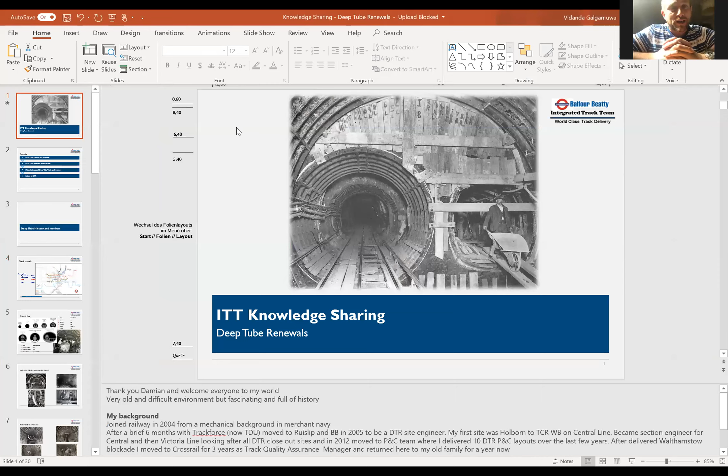So now for the main event, ladies and gentlemen. We're looking forward to Dan Onose doing his DTR delivery presentation. Dan's going to be touching on the unique challenges and absolute expertise that is absolutely unique to ITT working in the tube. Dan has 16 years experience, predominantly in concrete at track. As a site engineer on Track Alliance, we delivered DTR projects across the Central and Victoria line. We sort of landed around the same time.

When we arrived, we were delivering 1 or 2 sleepers a night. We were integral to increasing the output, and the best shift we ever did was at Mile End one night - we put 14 sleepers in one night. Now that's only 7 meters, because the sleepers back then had to fit into the tunnel rings, and they were put in at 503 millimeter centers.

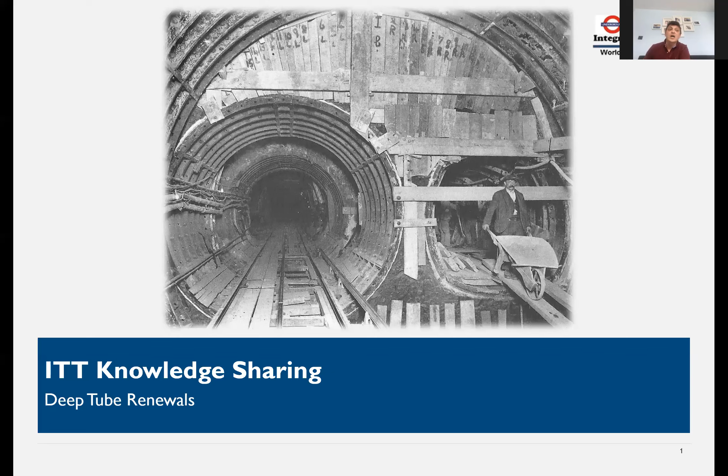So we're going to start with a history lesson and a few interesting numbers. I'll then briefly explain deep tube renewals methodology for those not familiar, chat to you about main challenges in the tunnels, and finish off with a quick look at what we're working on to improve delivery.

Deep tube history and numbers. London Underground's 11 lines total 408 kilometers in length. 45% of the network is in tunnels, of which there are 32 kilometers in subsurface and 149 kilometers in deep level tube.

A few numbers to note: the deepest station below street level is Hampstead at 58.5 meters. The longest section of tunnel is East Finchley to Morden via Bank branch on the Northern Line, that's 27.8 kilometers. And the maximum depth below ground level, again on the Northern Line around Hollybush Hill near Hampstead, is 67.4 meters below ground.

In terms of turnouts or P&C numbers, we've got around 850 on running lines, about 1,100 in depot and sidings, but we have just over 200 P&C units in deep tube concrete on our network.

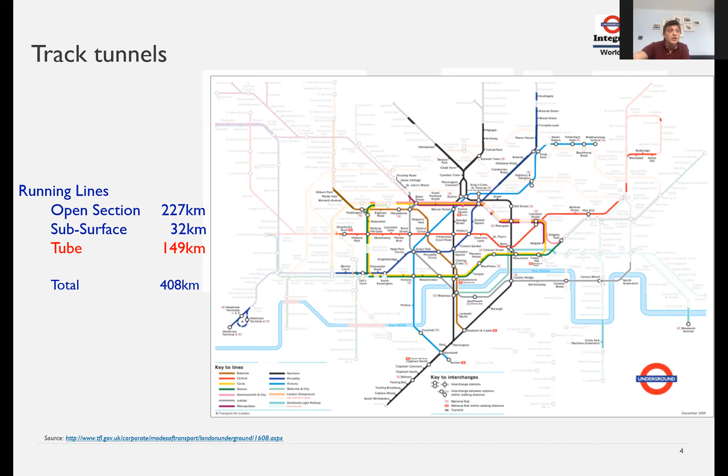Right, the tunnels. These are just cross sections showing the internal diameter of existing tunnels in London. Most deep tube tunnels have the same principle: 6 segments and 1 keystone. The keystone is used to lock the segments in place, and its location moves depending on the orientation of the tunnel. Most tunnel rings are grey cast iron, apart from the Victoria Line, which has concrete rings.

Brief history of deep tube tunnels. The Tower Subway is the first deep tube cast iron tunnel beneath the River Thames in central London. In 1869, a 410-meter circular tunnel with 2.1 meter diameter was dug through the London clay using a cast iron shield. Today, the tunnel is used for water mains.

Opened in 1890, City and South London Railway was the first deep level underground tube railway in the world and the first major railway to use electric traction. Today, its tunnels and stations form the Bank branch of the Northern Line from Camden Town to Kennington, and the southern leg of the line from Kennington to Morden.

Central Line opened in 1900, and its trains run in 2 circular tunnels having diameters between 3.5 meters, that's the White City to Liverpool Street section, and 3.7 meters for the remaining deep tube section. Victoria Line was constructed in the 1960s and was the first entirely new underground line in London for 50 years, with diameter increased to 3.8 meters. As a comparison, the Northern Line extension, due to open hopefully next year or 2022, has an internal diameter for running tunnels of 5.2 meters. Crossrail, although late, will be a fantastic new line with 6.2 meter diameter tunnels. Just to give you an idea, I could fit a Class 66 loco comfortably.

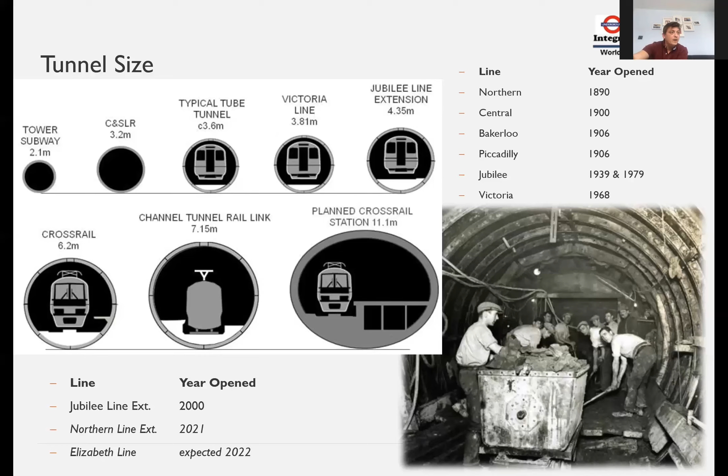Right, who built the tube? A particular band of hard-working men known collectively as navvies, the vast majority being former tin miners from Cornwall or farmers from Scotland and Ireland who had come from building the canals.

Construction methods used across London's growing underground railway improved since the opening of the first line in 1863. Tunnelling shields, based on the same principle as the pioneering device designed by Marc Brunel for his famous Thames Tunnel, were used to build the tunnels of what today are the Northern, Waterloo and City, Central, Bakerloo and Piccadilly lines. It was still a back-breaking job for the men working at the face of a tunnel shield.

The vast majority of construction work was still being done by hand. Unlike the cut and cover method, which only required shallow trenches, the deep level lines were built far below ground with actual tunnels being built.

Conditions were cramped, dark, cold and wet. They were working for a rate of pay that, although cheap to the company, was actually generous in comparison to other jobs. By standards of the time, navvies were well paid. They could earn 25 pence a day, that's £30 in today's money, which was almost double to those who worked in factories.

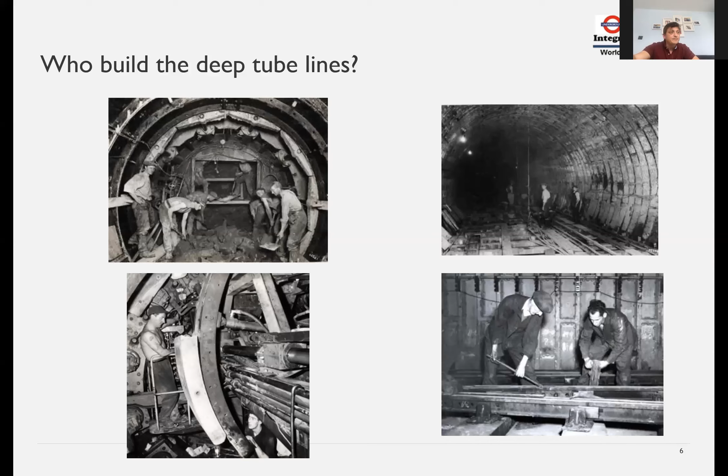How did they do it? How did they build these deep tube tunnels? After they dug the tunnels, most track laying activities were done by hand, as shown in these photos.

As you can see, everything was done by hand, swinging hammers and knocking the track into position.

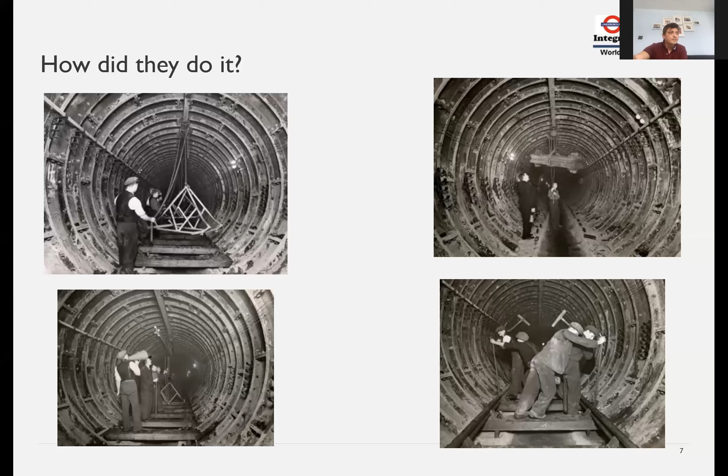Existing track form. So interesting fact, Central Line has the smallest radius on the entire London Underground. We have Caxton Curve with a 62-meter radius. Piccadilly eastbound at South Kensington has 89 meters. Bakerloo line southbound at Paddington has a 90-meter radius. So we're talking about very tight radius in the tube.

The original track consists of timber sleepers and bullhead rail with shingle filled channel. In platforms, there are concrete pits with timber pit blocks. Because of the age, this track is obviously life expired. Various attempts had been made in the past to introduce improved track forms. This included trying concrete sleepers using NTF415, so-called hedgehog concrete sleepers. In the platform areas, we had trapezoidal pit blocks, rubber booted pit blocks was also tried. Finally, direct fastening into concrete using Hilti anchors was tried as well.

In early 2014, Deep Tube began using Delkor direct fastening resilient baseplates. Several Delkor types have been tried, but now the 195 model is the normal choice.

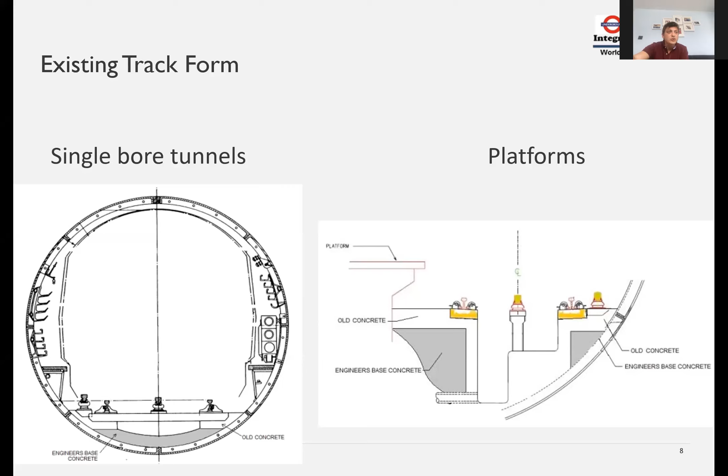Some fun facts about Deep Tube. Top right is the dead-ended tunnel. At Elephant and Castle Tube Station, there's a false brick wall, and the tunnel actually continues for a few miles to Camberwell Station. Engineering works begun and then abandoned in the early 1900s, and the tunnel is now sealed. A recently announced extension of the Bakerloo line to Lewisham via Old Kent Road and New Cross Gate has been chosen as the best route. Works are planned to start there in 2023. Depending on the final plans for the junction point, that could see the disused tunnel repurposed as additional storage for trains.

In the middle, it's cooler below poster - so I always said that to my DTR colleagues, and I was not referring to temperature. When the early tube tunnels were dug, it was so cool down there, 14 to 16 degrees Celsius, that the cool tube was seen as a break from the summer heat on the surface. Why suffer on a bus in the heat when there's a cool tube to take instead, said the marketing man. A few more details about this later on when we cover the heat and ventilation.

Bottom left, with a vertical rise of 27 meters and length of 61 meters, the escalators at Angel Station are the longest on the London Underground and the second longest in the UK. There's actually a longer one at Heathrow Terminal 5.

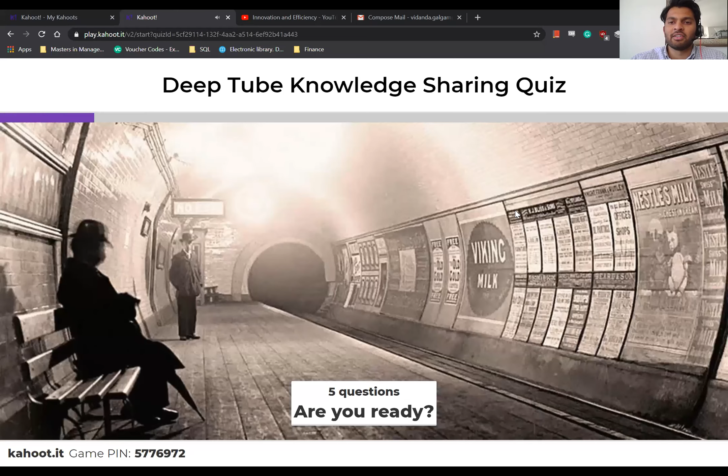Let's start, so this is the Deep Tube knowledge sharing quiz. The first question is, how many passenger journeys does the tube handle in one day? Is it 2 million, 8 million, 5 million, or 0.5 million? Remember, the quicker you answer, the more points you get. Three seconds left.

Okay, 11 people got it right, very very nicely done. Churchy is on top, nice one Churchy.

Second question is, which is the deepest LU station? Is it Covent Garden, Hampstead, Victoria, or Waterloo? 10 seconds left. There you go, 25 — so everyone was listening to you, Dan.

You'll be happy to know. Who's in the lead now? LW's taken the lead. The third question, which station has the longest escalator? Oh, that's an easy one. Hampstead, Westminster, Angel, or Clapham Common? Again, everyone's very quick in answering. Three seconds. 24, yes, very good listeners. This is too easy, LW still in the lead.

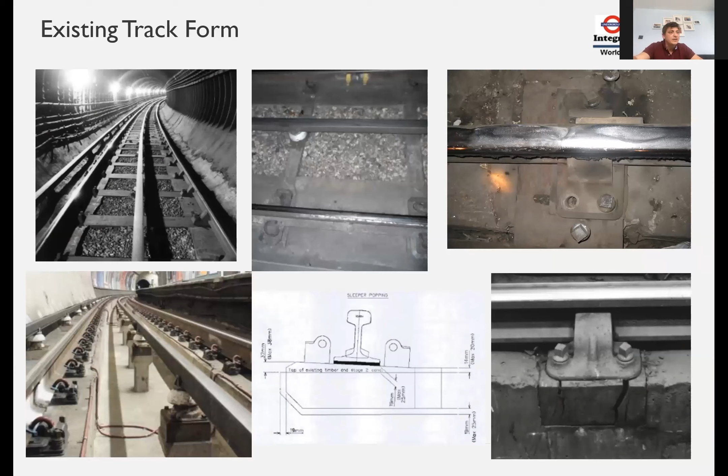Right, prep works in the deep tube. I'm only going to go through some of the prep activities we don't see on a BTR site. So shingle removal throughout the installation section. Then once you've done that, temporary walkboards placed throughout to have a sound emergency evacuation walkway and a safe walking route.

Asbestos removal, I'm going to touch base on that in a minute. Temporary sleepers installed to hold track alignment during platform recon jobs. Then you've got the site mobilization, because a majority of track recon materials have to be delivered to site prior to commencing the recon activities.

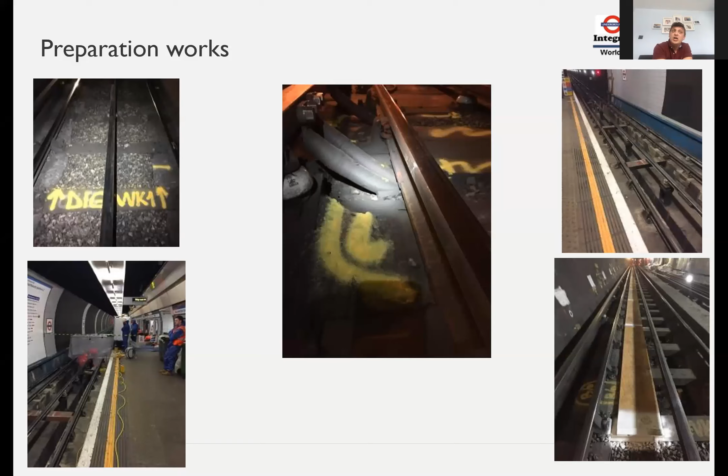Site prep drilling for bursting or breaking out where needed. And I'd like to spend a bit of time on posi conrail plinths or power cables. If you look at that photograph in the middle, obviously when you convert the bullhead to a flat bottom, that will clash. So there's a lot of prep works involved.

So first part of a recon shift is the removal of old sleepers and concrete. One thing to note here, the new rail, once installed, will always be realigned to new design prior to reconditioning. Where possible, design levels will also be implemented, although typically a certain amount of this is undertaken during the actual reconning stage. So once the area has been identified, any design alignment adjustments are marked up by the engineer.

Sleepers cut or popped out of their pocket. Concrete bursting carried out, concrete separates from the engineering base. Manual breakers are used to reduce large sections of concrete that are too large to manhandle. Spoil created, packed, and swept.

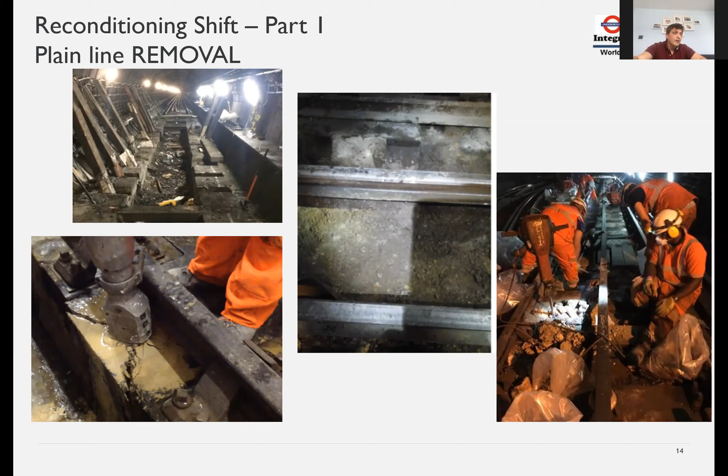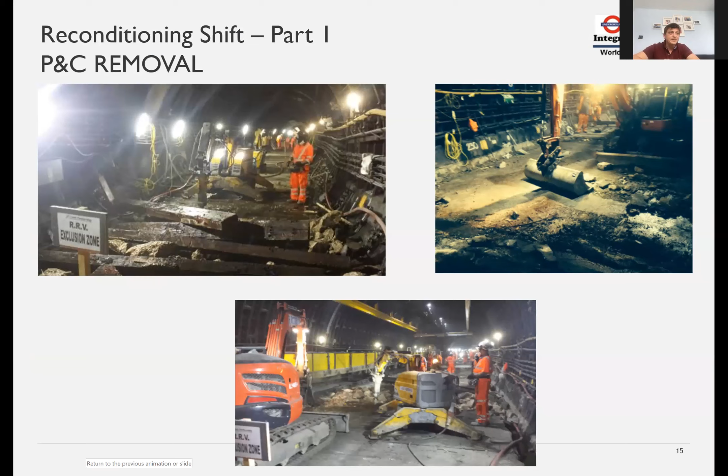Right, second part, the installation of new base plates and concrete using top-down methods. So same as most of the slab tracks methodologies, we're using top-down method. Pre-assembled Delkor base plates are hung onto the rail.

Shuttering installed using spacers to enable later on to install the GRP walkway, that's glass reinforced plastic. Track alignment checked against design. So for the engineering hour works, no jig supports are needed, the sections of track are too short to allow any movement.

Clay applied around base and sides for preventing concrete running out. Track components protected from concrete splatter. Rapid hardening concrete mixed and poured. We use various types of concrete, but Techrock and Instarmac are widely the most frequent, both with 10-15 minutes workability and 1 hour for 15 Newton strength, which is enough for passenger trains to run.

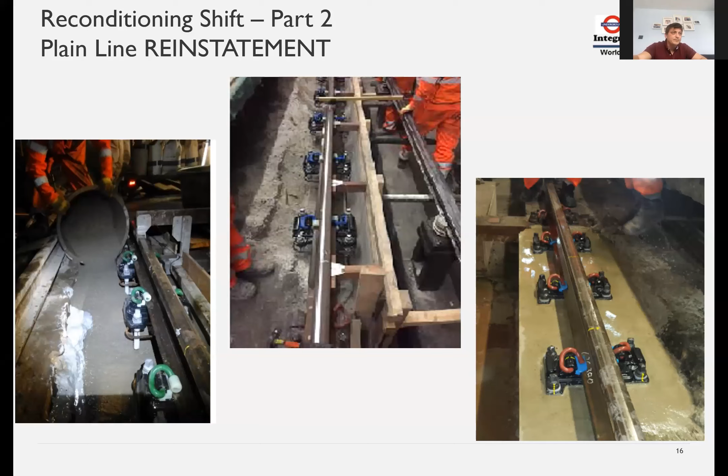P&C recon, like I said, breaking out the engineering base on P&C sites is very challenging because of the size and depth required, and the uneven surfaces can create cracks in second stage concrete once poured. So I've got 2 photographs here.

How much we've changed from when we started in 2011, when we used manual rollers, and now we're using 6-ton gantry cranes. This is Liverpool Street versus Paddington.

So the renewal of points and crossings on London Underground is a complex logistical challenge. In the tube sections, the existing turnouts are cast into the tunnel timber concrete. At the same time, there's a general policy for all renewals to replace bullhead rail with modern, heavier flat bottom rail.

This in turn requires the air-operated points to be replaced by more powerful electric drives, and Sherlock is a good example. In tube sections, the renewal constraints are even greater. So the work on a crossover is often split into two 52-hour weekend possessions, with an inevitable impact on the timetable and inconvenience for passengers.

The temporary sequencing of the works is critical and can often require plain lining of the main route, whilst the other sections of the turnout are broken out and replaced. The new design alignment is also often a constraint, as the new points and crossings have to be fitted within the existing tunnel space. Furthermore, there is an increased risk of engineering overruns because of the complexity of the work and the limited time and access available.

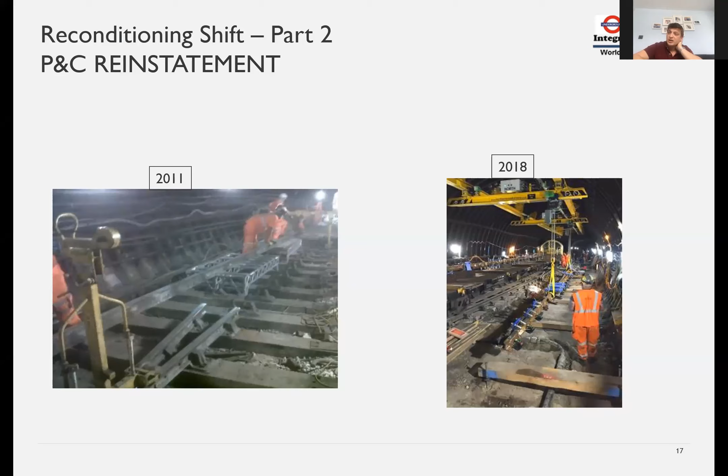So all the gantry cranes we've installed have been passed on to the maintainer. And after a period of a year or two of us maintaining it, everything goes onto the maintenance department, and they find them very beneficial, as they admit it. They get used quite often for deliveries and unloading heavier loads. So there was talks a while back for us dismantling some, but at no point did we do that with any of the permanent gantries that we put in.

Okay, right, deep tube drainage. So last week's drainage session spoke about drainage in more detail, and John O'Sullivan's presentation was quite informative. There's no standard construction across all tube tunnels. They all, however, utilize a combination of common components: small half-round channels running longitudinally at the edge of the track, concrete channels within the 4-foot, usually shingle filled, small diameter 75-100 mil perforated pipes within the channels, and then access chambers, bailing pits, sumps, pumps, associated control equipment.

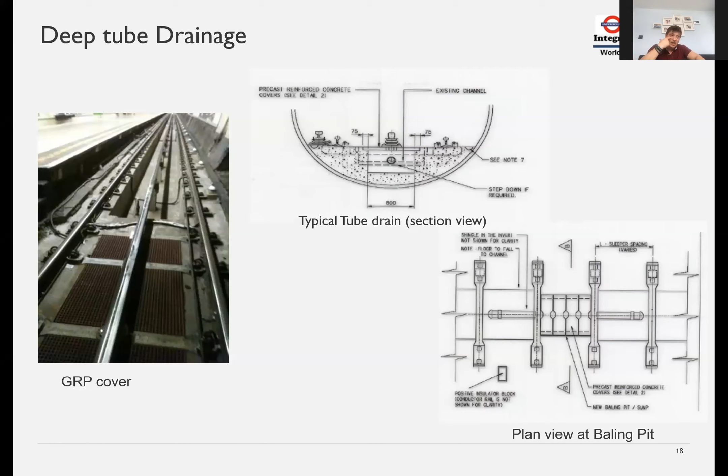That's the usual equipment. We are installing a permanent channel with a continuous GRP cover that also provides a very good walkway. I've mentioned earlier the GRP, glass reinforced plastic, and there's a photo there on the left-hand side.

Right, moving on to main challenges of the deep tube track environment. So the first challenge, probably the most obvious one, is location and space. We have no room for mechanized vehicles to aid with manual labor activities. Although we're mitigating that, and we introduced, like I said, gantry cranes for big P&C jobs. We've got LG1 route approvals for TB250 RRVs and 3-ton mini diggers.

A very big challenge is the age of the tunnels. At Holborn in 2016 in the museum sidings, we removed an 1886 base plate still in service — you can see a photograph top right. Even though it was on the siding road, we're talking about a base plate over 100 years old. Obviously, tunnels are not well understood and catalogued until recently. There's a big safety risk if we lose a tunnel, and a very big reputational risk if we do lose it. There's always progressive degradation — you've got tunnel seepage and corrosion affecting the rail, concrete surface or drainage, and obviously that will slow down the handback to the client.

Tolerances — you've got plus or minus 3 mil. That does require more attention to detail. Why? On my first site, Holborn to Tottenham Court Road on the Central Line, there were train shoe marks on the tunnel render showing just how critical clearances are.

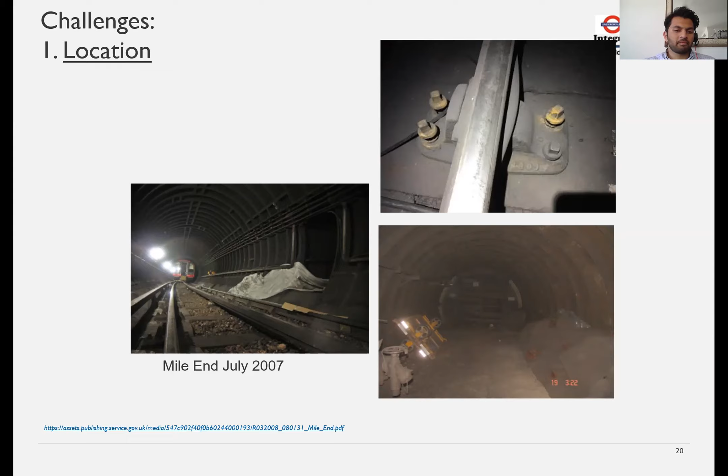Right, moving on to asbestos. As a not-so-fun fact, Steve McQueen did die from an asbestos-related disease. It was thought this was due to asbestos used in movie sound insulation and protective clothing and helmets he wore when racing cars. However, Steve removed asbestos lagging from ships while he was in the Marines.

When planning a job or working in the area, remember the east end of the Central Line, north part of the Jubilee, and most of the Northern Line are known areas to have asbestos, as shown on the map in the middle of the slide. When I started in 2005, most of the Bakerloo Line had the noise reduction shelf that has now been removed.

Central Line sites, I reckon all platform jobs, or at least all the ones I've been on, had asbestos-contaminated pit blocks that had to safely be removed by a specialist contractor. However, that takes a lot of time, and it's something that you need to plan for when you look at similar jobs.

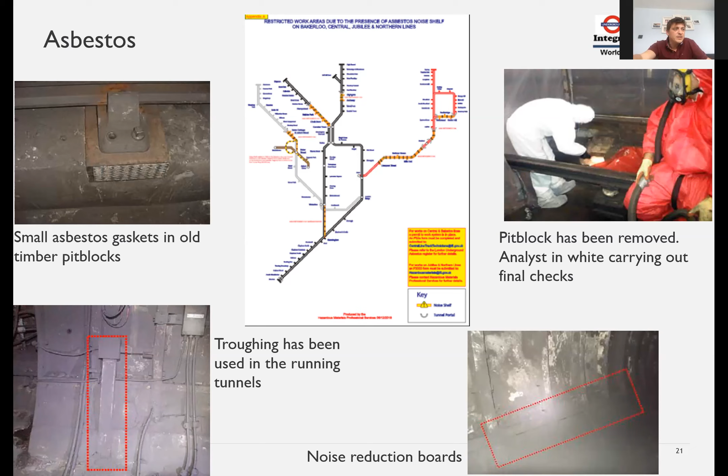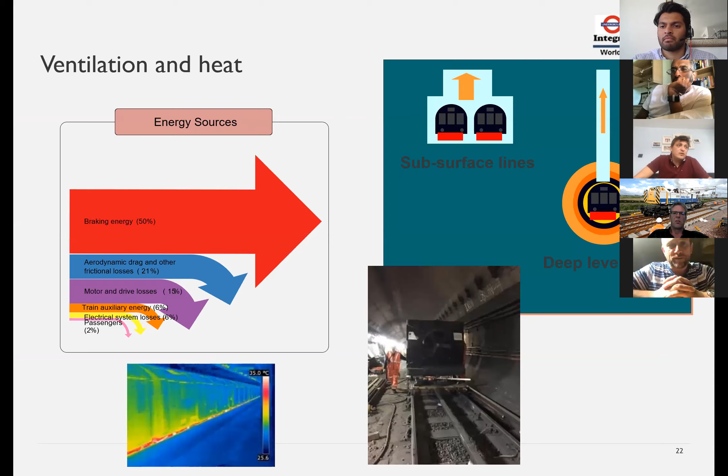Right, moving on to ventilation and heat. About 21% of the heat in the tunnels comes from the movement of the trains themselves, from aerodynamic drag and other frictional losses. The motor engine accounts for about 15%. The electrical and auxiliary systems are the remaining 12%. But about half of the heat in the tunnels comes from just one source - trains slowing down, conversion of movement into heat by applying the brakes.

London's deep tube lines do not have enough air passage to the surface to let the warm air escape, just like the subsurface ones have. We had up to 40 degrees Celsius on sites during weekend summer closures, so you can tell how warm those tunnels can get compared to subsurface.

Where does the heat go? Heat transfer into tunnel walls accounts for about 80% of that. Initial tunnels, like I mentioned, were built and operated at 16 Celsius. Mechanical ventilation, the big ventilation shafts, only remove about 10% of the heat. While that heavy, thick clay is lovely to tunnel through, it's also a very good heat insulator.

Over the years, the heat from the trains soaked into the clay to the point where it can no longer absorb any more heat. So tunnels that were a mere 16 degrees in the 1900s can now have air temperatures as high as 30 degrees Celsius on parts of the tube network.

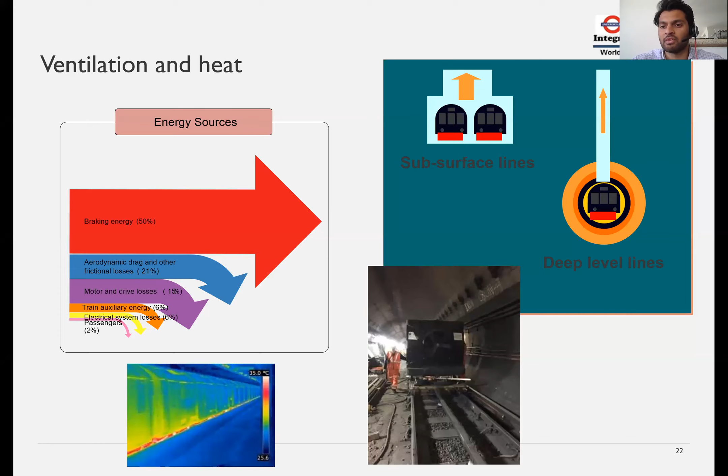Before we move on, I think it's quite a good statement made by Henry Fenn. He's saying there's a hazmat team at LUL who are arranging training sessions on specialist asbestos awareness. Maybe that's something DTR staff or people who work on DTR can get involved in.

Yeah, absolutely. Part of our Deep Tube PNC team had received this induction, and it's quite useful. I recommend everyone who's got half a day to attend.

Right, moving on to challenges. The most obvious one again is concrete track. So I'm going to briefly touch on the costs of deep tube jobs, compared to BTR, ballasted track. So a BTR PNC, if a point costs about £150,000, a deep tube one would cost £2 million.

For plain line, on average, a BTR is about £3,500 for a linear meter. The deep tube is double that, £6,500. So a huge difference in costs.

Why? Logistics - the extensive logistics plans required. We paid in the past £300,000 for road closures, £100,000 for pumping concrete, additional staff and risk mitigations, additional power for tools. The length of prep and follow-up works.

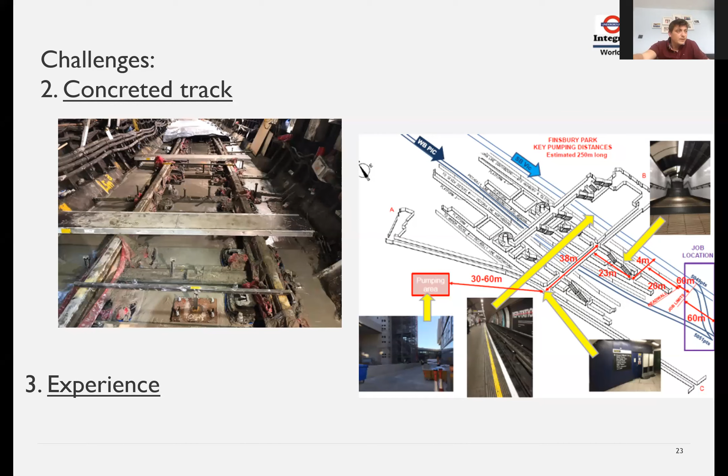Improvements we introduced over the years: I think the most important one is that the DTR PNC team has had a culture of continuous development and a heavy focus on lessons learned. Some of the improvements include the use of a gantry able to lift up to 6 tons of materials, better management of the risks of buried services, the introduction of concrete bursting as a safer and more efficient alternative to breaking, and the use of hippo mixers for engineering hours.

Shims under the Delco base plates have been used during reconstruction, meaning the sleepers can go in lower than the original being replaced. Track alignment jigs rather than jacks and wooden wedges. Concrete blankets to speed up curing by retaining the release of heat during the chemical reaction. GRP baskets, saving shuttering time around stretcher bars.

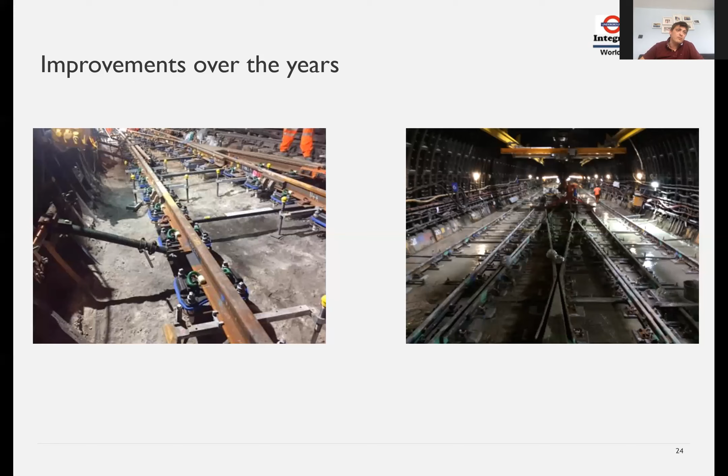Approved use of Delco resilient base plates for PNC configuration - remember, Camden was the first site we did that. Use of Converge to provide live and more accurate understanding of concrete strength during curing, and scaffolding pipelines rather than hand mixing, or for those of you who remember, hand batching on the back of an engineering train.

So all these improvements were introduced over the years. And just to summarize that, Vid, over to you.

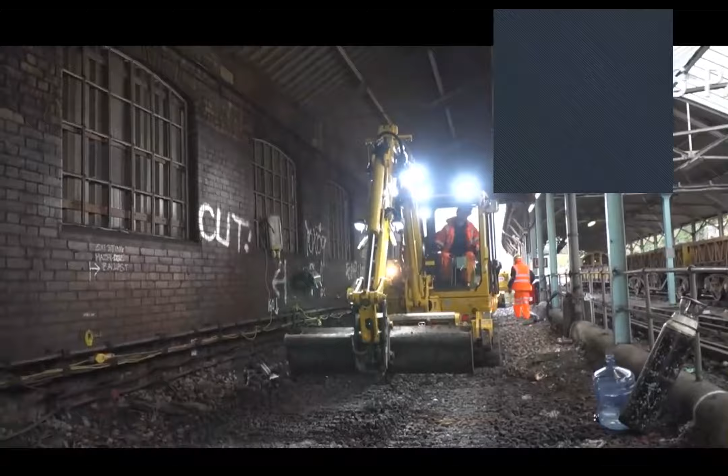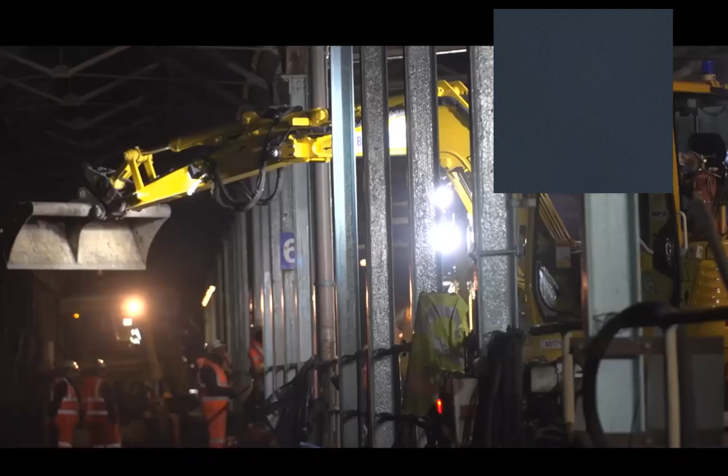This job's been in and out of the programme for many years, and part of the reason is due to the constrained nature of the site. We have a roof over the top of the sheds, and also upright stanchions every 3.5 metres, and the challenge here is being able to find machines that can work in this environment.

One of the big complexities here has been working alongside Paddington, so we're passing engineers' trains from this worksite into Paddington in order to leave the possession. Throughout the closure, it's probably been about 40 or 50 vehicles throughout the weekend in and out that we've had to deal with, as well as making sure we've maintained a route for the emergency services to St Mary's Hospital just up the road.

We've had the police on standby for the concrete, and we've had streets monitoring the locations of the lorries so they can turn signals to green if required to get them on site on time before the concrete cures. We've had a really successful couple of weekends - we're shifting about 28 cube of concrete each day, and this concrete is a special type with a rapid hardener in it, which allows trains to travel over it after 8 hours of us placing the concrete down there.

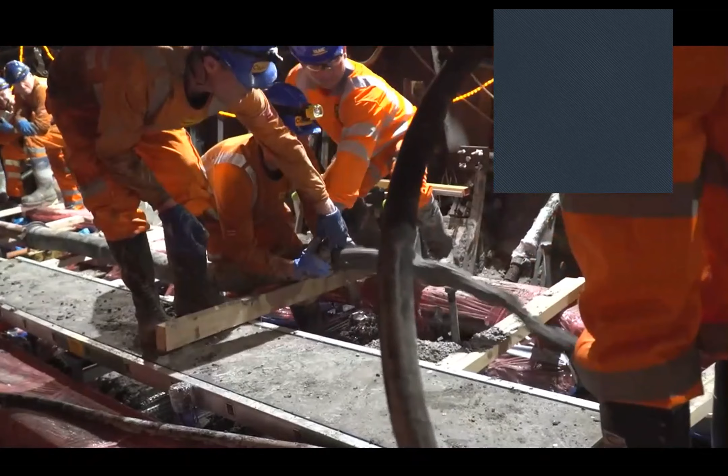Professional, really professional this weekend. That goes from the planning and everything that's been put in for these challenging weekends, not just Paddington, also Queen's Park yet again. Absolutely outstanding.

Hope you guys enjoyed that. It really gives you an idea of the type of work that's done in the deep tube. Let me share this presentation again. Back to you, Dan. Thank you, Vid.

Moving on now to the last part of this presentation, future of the DTR and future developments. There are a lot of future developments in progress for deep tube works, and I'm going to lead on these innovations. With my experience and support from London Underground, we will get there. And if anyone from the audience can help, please drop me an email or share your idea.

We can make deep tube renewals a much easier experience. So I'm going to run through a couple of ideas and plans we have for mobilization and prep works. For future P&C renewals, we plan to install a drainage channel in the cess area to avoid breaking out the 4-foot drainage pipe like we did in the past. New P&C layouts will be pre-built in Lillie Bridge Depot, facilitating realignment training and familiarization, along with reducing the cost of inspections. We'll pre-pour the cess drainage channel and 6-foot area in engineering hours, reducing concrete volume. Engineering trains are stabled in various depots to take possession and access track earlier.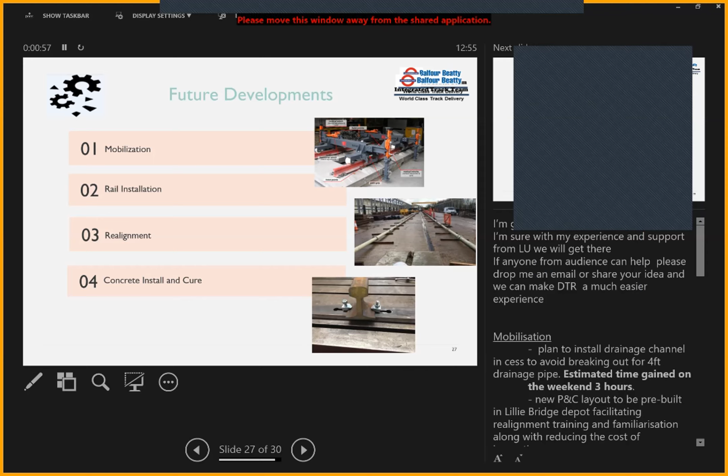For concreting and curing, we've successfully lab tested and trialed a new ready mix concrete, a pumpable mix concrete, to reduce curing time from 9 hours to 6 for 5 newtons strength, which is the required concrete strength for us to do most of the activities.

While the VCM2 project is taking shape, we're looking at maybe hand mixing quick hardening concrete in switch areas to install point machines and allow point fitters to work during mass pour curing time. This will help with decluttering the site during demobilization. We're exploring base plate covers to protect the layout and reduce cleaning time, rather than wrapping with cling film.

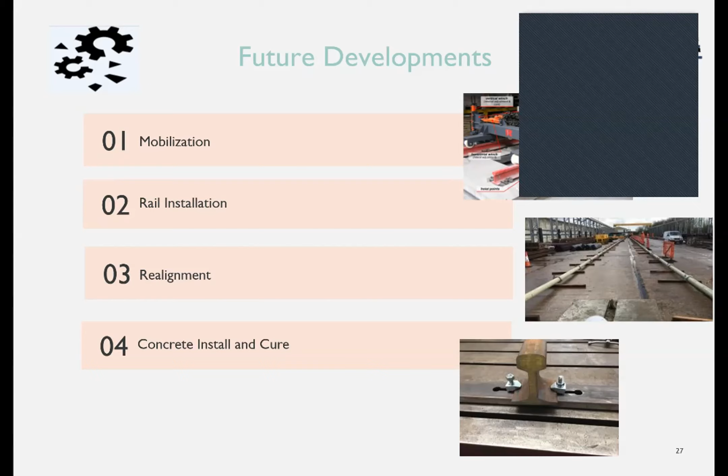For conrail installation, why not try installing the conrail before the concrete pour, so it can stick well during the curing time? We're also exploring the use of concrete sleepers for preset conrail support. So all these are things that we're looking at. Most of them, I must admit, are for P&C.

Another big innovation is the VCM2. VCM2 is a Balfour Beatty innovation being driven due to the historic problem of being unable to deliver a deep tube crossover in 52-hour possessions. The reason we only do 1 or 2 a year is lack of 72-hour closures, which tend to be at Easter or Christmas. But VCM2 brings a solution to this problem, and ITT has ambition to reduce the closure further, even maybe deliver DTR P&C in 27 hours.

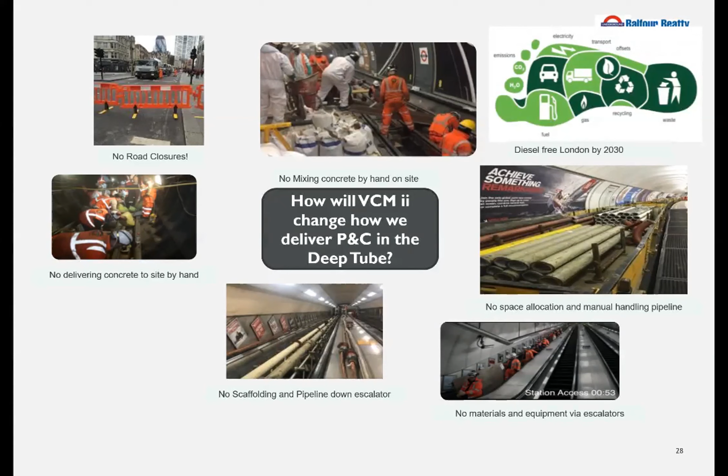So what does the VCM2 mean? No road closures, no mixing concrete by hand on site, diesel-free London by 2030, no delivering concrete to site by hand, no space allocation and manual handling pipeline, no carbon emissions for London, no scaffolding pipeline down the escalators, no materials and equipment going down via escalators.

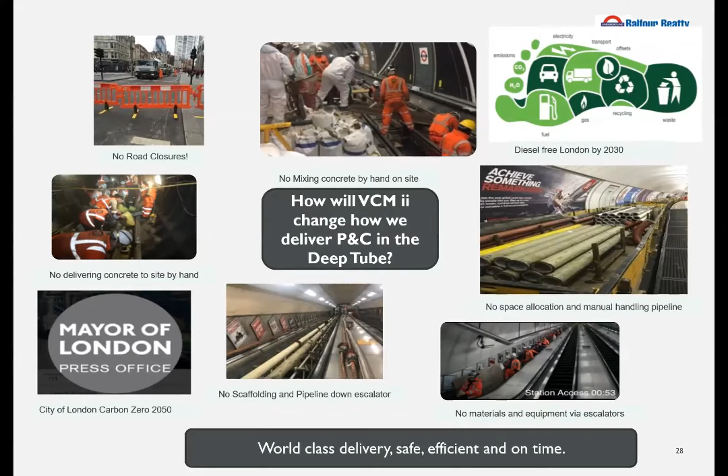And that's it. I hope you enjoyed my presentation. All I can say is these fantastic people build these tunnels and will proudly look after their work and take it further into the future. So if there's any questions, if not, I've got some more historical photos. So we've got top left.

Oh, Dan, there are a couple of questions. So, how long have we been using the same methodology?

Especially with the P&C, we very slowly improved it, but this methodology was used by people installing track on the Victoria line 60 years ago. I'm going to share after this presentation a clip, a very interesting documentary about how the Victoria line was built. It shows a couple of sections, how they actually concreted it, how they put rail together. It's probably not changed as much as we'd wish over the last 50, 60 years, because of the size, most things are still happening by hand.

Sadly, not much. Okay, Steve Harper's also said, Dan, this is a great session, and he's very proud of the work that we're doing at ITT. He'll join us for the next one. Thanks for coming, Steve. Another question that came in, if you just give me one second.

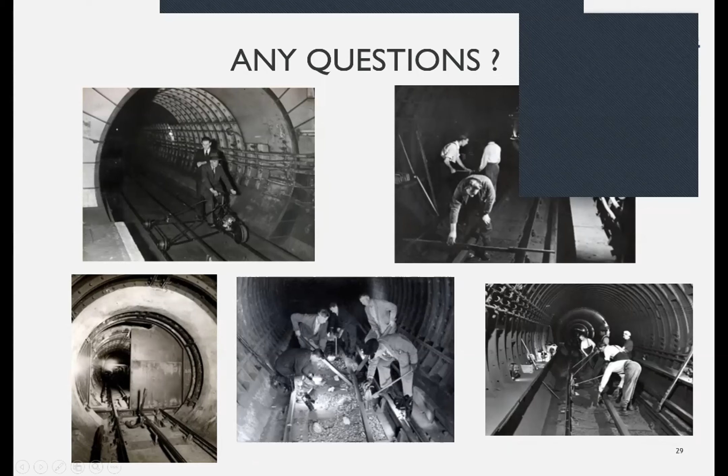Is there any other metro system we can learn from that do similar DTR works? I think we are world leading when it comes to track renewals, especially deep tube. I haven't heard of anyone doing slab track deep tube renewals over a weekend. As you probably know, the safety records at other metro lines in the world are not as good as ours, so I like to think we're one of the best in the world, and I strongly believe that. Maybe there are ideas, but they're working on metro systems built 50, 60, 70 years ago. We're talking about 150-year-old tunnels, probably the smallest metro tunnels in the world. So even though the challenges are bigger, I think we're still the best in the world when it comes to renewals.